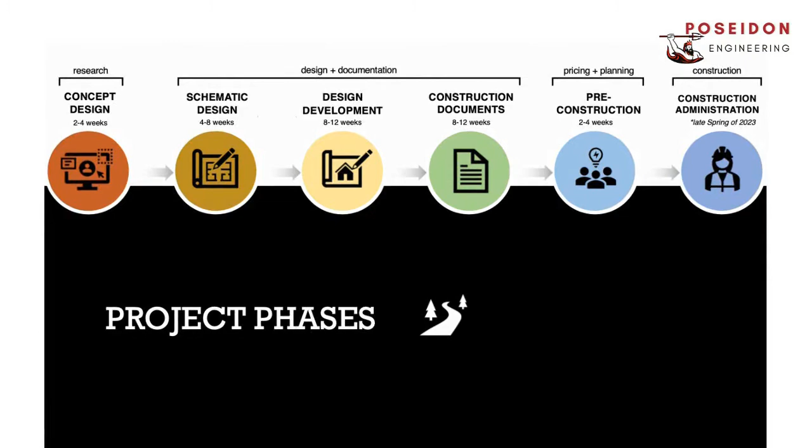Furthermore, the construction team began producing two main deliverables during schematic design and design development phases. First, the preliminary cost estimate, and second, the preliminary construction schedule. The two deliverables are based on project definition and are adjusted to match any design changes made in creating the final building design. Once design is fully developed and approved by UCSD, contract notice to proceed and job site mobilization commences, which is scheduled to start May 9, 2022, as illustrated in the schedule here.

Within the schedule, I'd like to highlight the new construction phasing that occurs after about a month of site work and selective demoing. Foundation scope of work for all four buildings is expected to be completed within 4 months. Once foundations phase is entirely completed, the scope of work for structure and shell commences with Building 1. Between Buildings 1 through 4, activities are identical, and the buildings to follow are arranged with different start dates. With that said, Building 1 is expected to be completed January 9 of 2023, and the following buildings are completed a little bit over a month from each succeeding building completion. Thus, the scope of work, structure and shell, is expected to be completed early May of 2023.

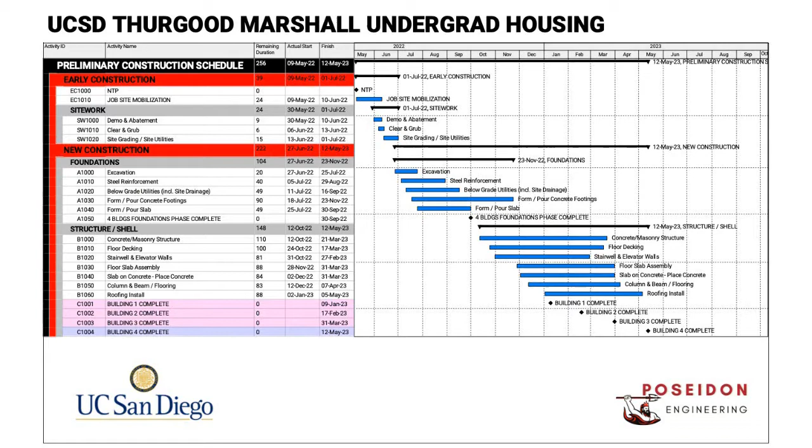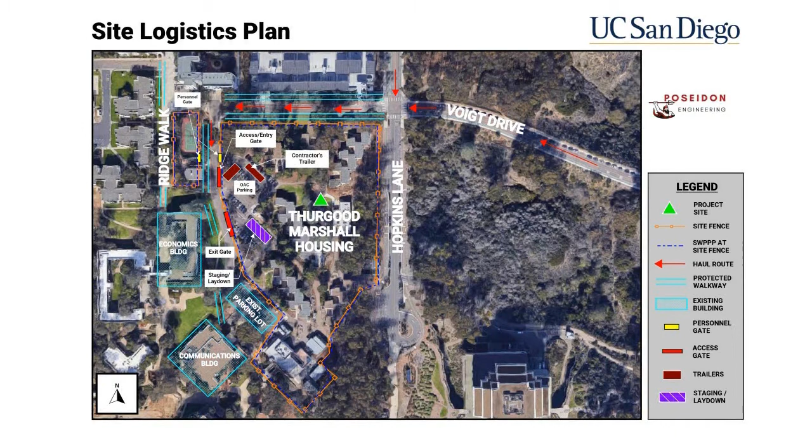Our construction team established a plan that was organized to most efficiently lay out the site during the construction process. As seen in the overhead view of the site, the truck haul routes run along the north side of the site on Voigt Drive, where they will turn left and enter through the west gate. As seen in the northwest portion of the site, the OAC parking along with the contractor's trailer is located by the entry gate. For scheduled material deliveries, the trucks will enter and proceed towards the exit, where the material laydown area will be located. These routes are designed to make sure that deliveries are timely and efficient to stay on schedule.

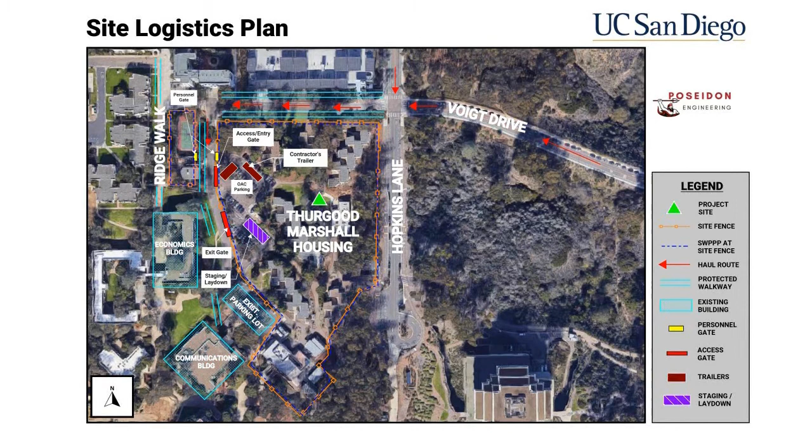Surrounding the site boundary, there is fencing, which is depicted by the orange lines, along with the SWPPP BMPs that line the fences, shown by the dark blue dashed line. Lastly, the yellow boxes shown between the two construction areas are the personnel gates for team members to enter and exit the construction site from. As part of our pre-con site logistics plan, it is important to take into consideration the SWPPP, or Stormwater Pollution Prevention Plan, layouts prior to the start of digging and rough grading.

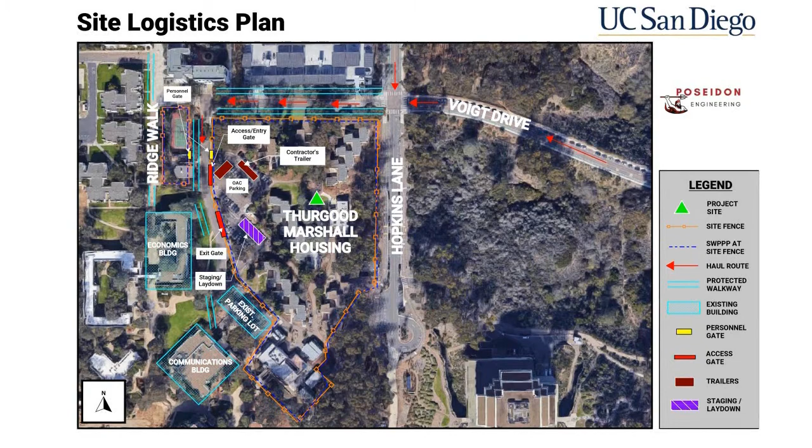As the civil and structural engineer for this project, I was responsible for designing the floor plan, foundation, and shell designs for one of 4 newly constructed residence buildings. Each residence building is expected to house 500 students.

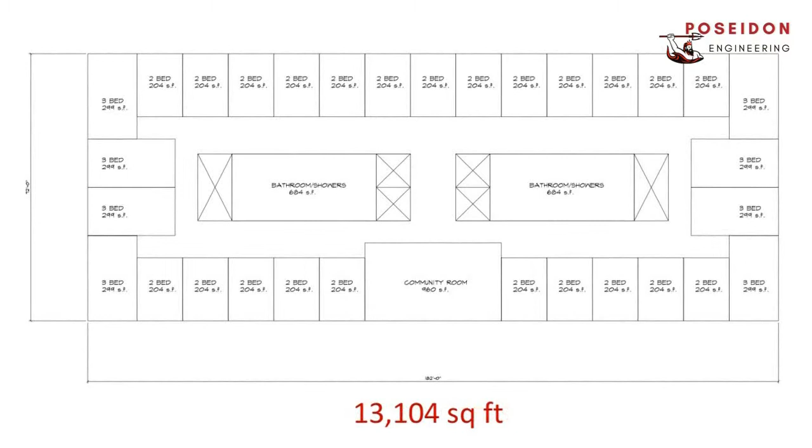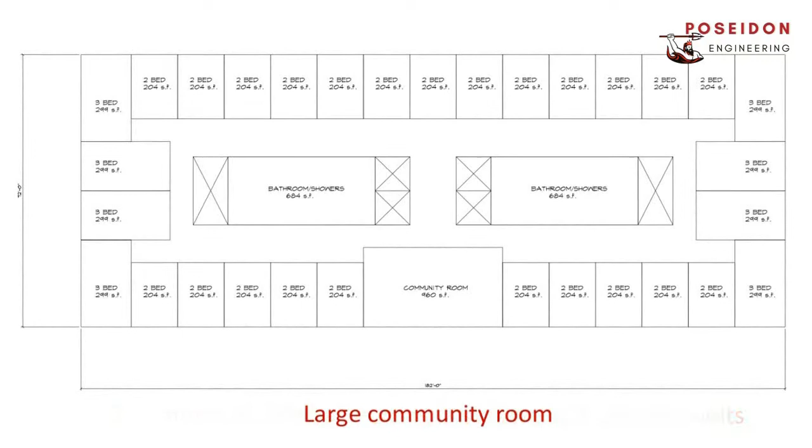The redesigned floor plan of the housing units will be 13,104 square feet, composed of 2 to 3 person bedrooms with 60 to 70 students per floor, along with 2 communal-style bathrooms, 2 stairwells, 2 elevator units, and a large community room. The shell design proposed consists of 7 identical floors of the designed floor plan layout with a 15-foot span between floors, utilizing 9-foot high ceilings with 6 feet allowed for mechanical systems, floor framing, and floor deck.

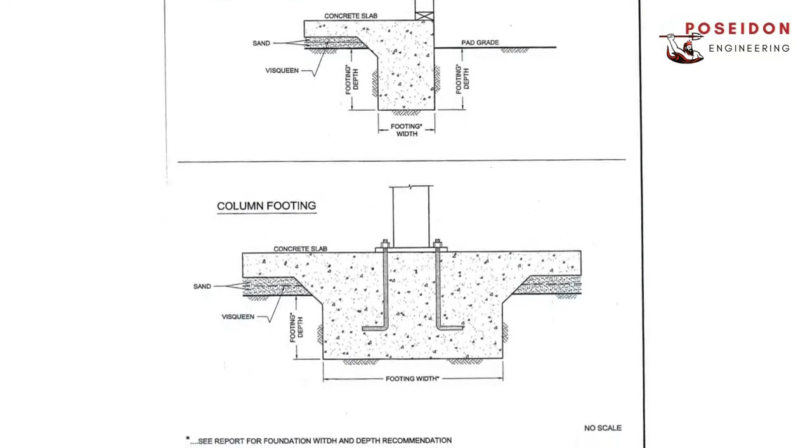A geotechnical study completed through GeoCon Incorporated was obtained, providing details and recommendations based upon soil studies and reports completed. The soil studied consisted of 3 general soil types consisting of topsoil, Lindavista Formation, and stadium conglomerate, with the most predominant bottom layers proving to possess adequate support characteristics for structures. These studies further determined a continuous strip footing foundation with at least 12 inches of width and at least 18 inches of depth were recommended.

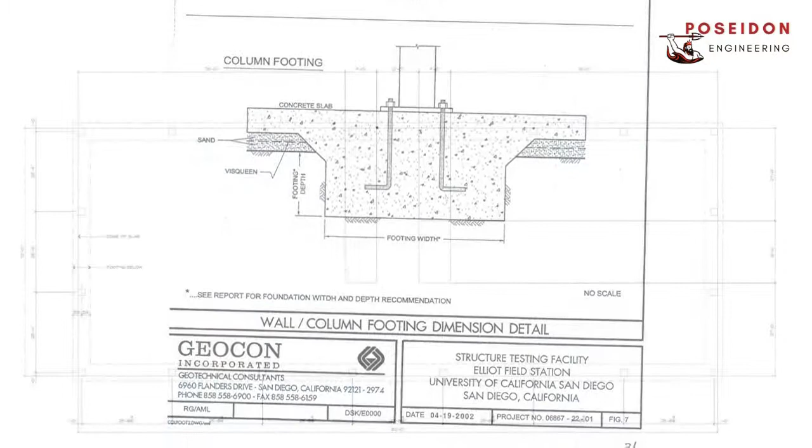The structural design method utilized is a load and resistance factor method following the American Concrete Institute and the American Society for Testing and Materials standards and recommendations. The foundation layout consists of a 72-foot by 182-foot structural layout. Per geotechnical data, the maximum bearing capacity that the foundation can uphold is 10,000 pounds per square foot, with a current allowable bearing capacity of 4,000 pounds per square foot, with an additional 1/3 for an increase in dead and live loads.

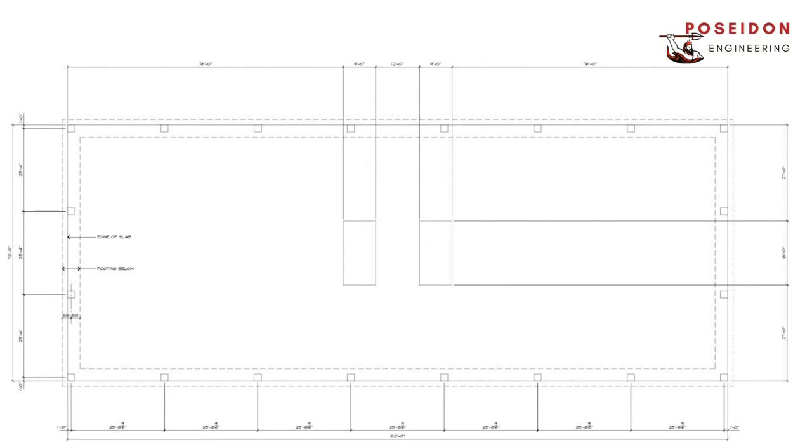A concrete slab-on-grade design method will be utilized, requiring a thickness of at least 4 inches and reinforced with No. 3 steel bars. Beam and columns utilized within the structure and foundation will utilize a steel-reinforced concrete design approach.

The environmental engineers developed sustainable and adequate water, wastewater, and stormwater systems for the new residence building. In preliminary studies, the existing site's location of pipes and inlets were obtained from UCSD's main campus BMP treatment control. The Thurgood Marshall College currently has 4 existing BMPs on site. However, there are currently none located at the existing Lower Marshall apartments. It was found that the closest BMP to the existing Lower Thurgood Marshall apartment is located near Goodies Market, about 150 feet from the site.

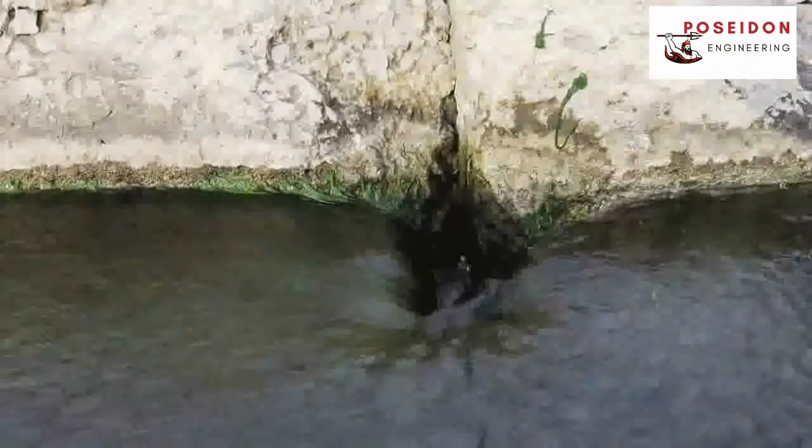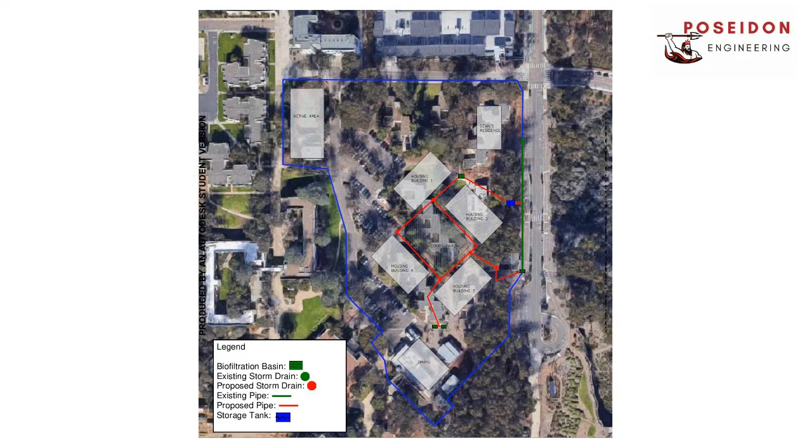Drainage studies and a stormwater quality management plan were conducted in order to ensure that stormwater is adequately managed, treated, stored, and reused. The new proposed site includes implementation of 4 new BMPs, storm drains, 5 pipes totaling 1,095 feet in length, and a storage basin within site boundaries in order to further meet existing goals of stormwater management and treatment. An approved stormwater quality management plan has been developed, defining the controls and handling of stormwater runoff from the completed site.

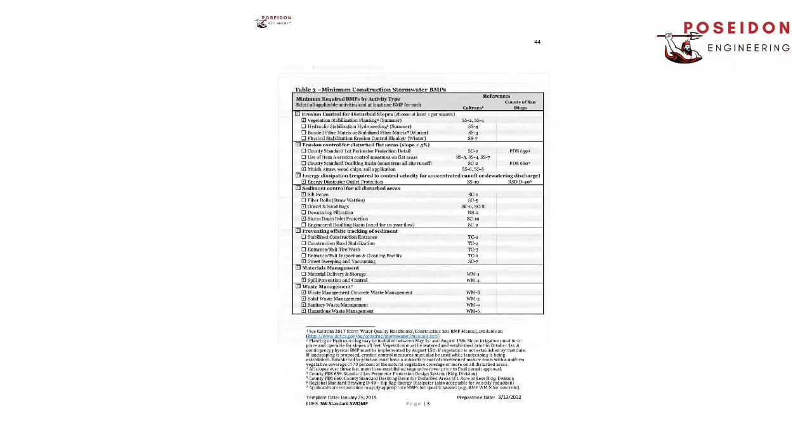Treated stormwater will be stored and sustainably reused for irrigation of native and climate-appropriate landscaping, conserving potable water and maintaining the hydrologic balance. This reuse system will earn credits complying to LEED for neighborhood development pilot, satisfying the credit to minimize water use in buildings and for landscape irrigation by installing landscaping that does not require permanent irrigation systems.

The domestic water and sewage systems were both effectively designed in order to adequately support the housing population. Wastewater flows were computed to be 44,000 gallons per day. Pipes were sized and upscaled for a factor of safety and in the case of potential capacity issues, and will be uniformly composed of PVC. In the unlikely case that there are capacity issues in terms of the proposed sewage system, the UC San Diego Sewer System Management Plan is designed to prevent and reduce sanitary sewer overflows, and routine maintenance and inspections will be conducted regularly.

The domestic water system will comply with the UCSD Disinfection of Potable Water Systems Guide, and Poseidon Engineering has consulted Trident Technologies to perform a commercial disinfection. An average daily demand of 330,000 gallons per day and a peak demand of 792,000 gallons per day will be required for the entire building.

Fire flow demands were calculated to be 8,000 gallons per minute for the building, resulting in the configuration of 5 fire hydrants with a maximum capacity of 1,500 GPM, and will be implemented on site 250 feet away from the buildings, complying with National Fire Protection Association guidelines.

Poseidon Engineering is committed to and thrilled to fulfill UCSD's long-range development plan to adequately accommodate the student population in the Thurgood Marshall Housing Project. Our driven, innovative, and passionate team will ensure that UCSD's housing and academic goals are met.